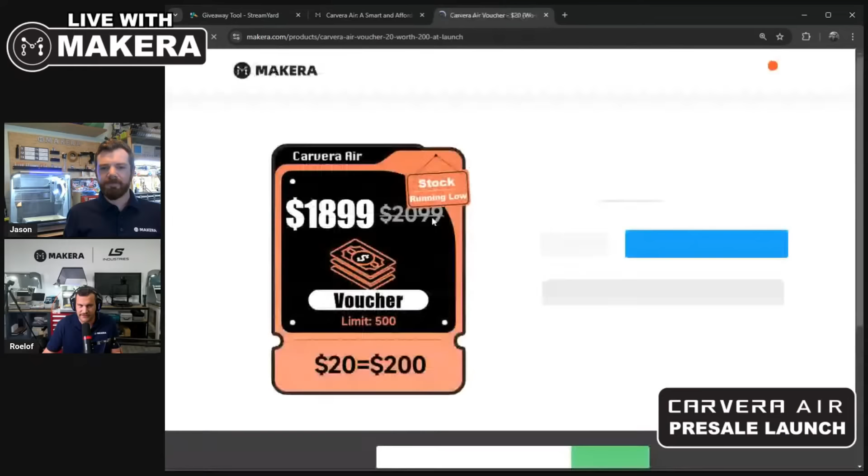So this is our website, we've just updated it. You can go to our store, to the Carvera dropdown, add to cart, and actually purchase the machine right now—it just went live. So obviously, the quicker you are in purchasing, the quicker you get your machine. Another big feature we have is a discount coupon code you can click on, where you can get another discount on top of the $2099, where you can buy the machine with the voucher for $1899 US. So everything is live, we have just launched, so if you guys are ready, go for it—the store is open and we're waiting for your orders, and we're ready for it.

And I think what we have to do here is, if you want the discount code or the discount voucher, you can buy the voucher first.

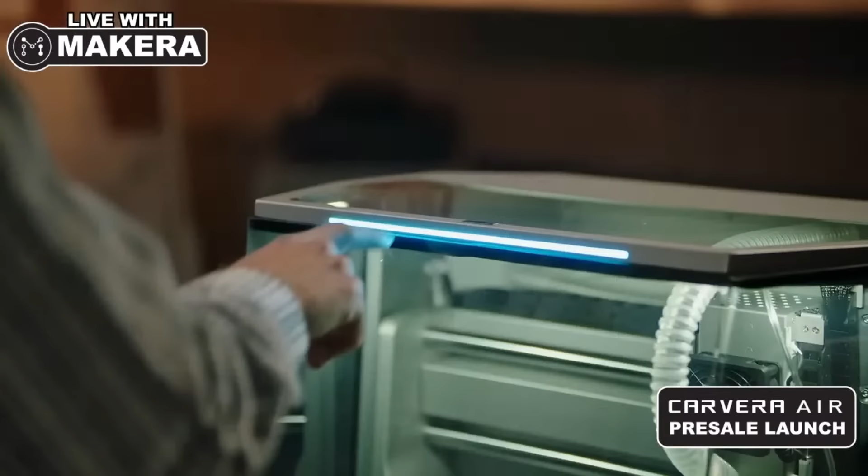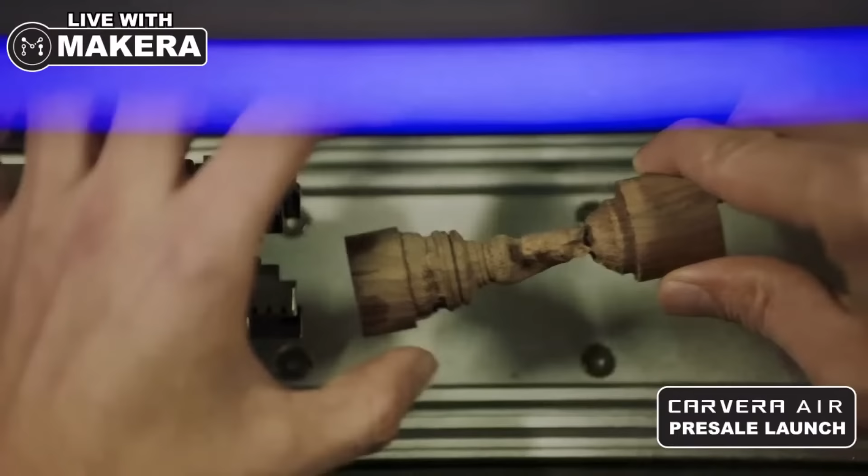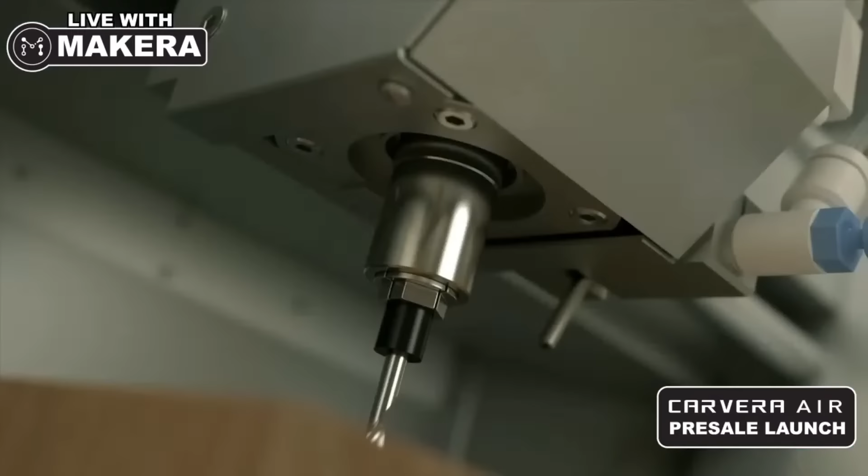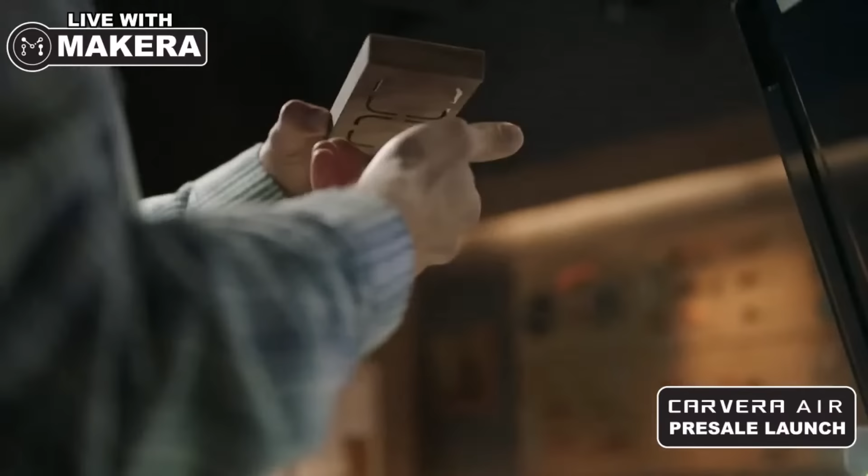Hello everyone, I'm Josh from Makera. Welcome to the Carvera Air pre-sale live stream, and good luck with the giveaways. As a group of veteran makers, the Makera team started by sharing common interests in model aircrafts, drones, robotics, and electronics. About 10 years ago, we were introduced to desktop digital fabrication tools like CNC machines, 3D printers, and laser cutters, and we were instantly hooked. These tools fundamentally expanded the scope and capabilities of what we can make. We can hardly imagine how fast, how precise, and how beautifully we can create almost anything. The only limit is our imagination. CNC machines have been developed in the industrial sector for decades, but remain rarely used in the DIY community. Unlike 3D printing, which has limitations in material precision and strength, CNC milling can process almost any material with high precision while retaining the original strength. We were thinking, why are there no CNC machines that are smart, precise, easy to use, that anyone can learn and use? 3D printing used to be a difficult industrial process, but now anyone can use a desktop 3D printer. For CNC, that kind of machine didn't exist, so we decided to make our own. Our mission is to democratize precision manufacturing by creating innovative, user-friendly, and accessible CNC solutions. We aim to empower makers, hobbyists, and professionals alike to bring their ideas to life, breaking down the barriers of traditional manufacturing with advanced yet easy-to-use tools.

Back in 2021, we launched our first product, Carvera Desktop CNC, on Kickstarter, introducing features like automatic tool changing, auto probing and leveling, fourth-axis machining, and laser engraving, all in a compact desktop machine. We raised over 1.7 million from more than 500 backers, becoming the most funded CNC project on Kickstarter at that time. Since then, we have sold thousands of Carvera machines worldwide.

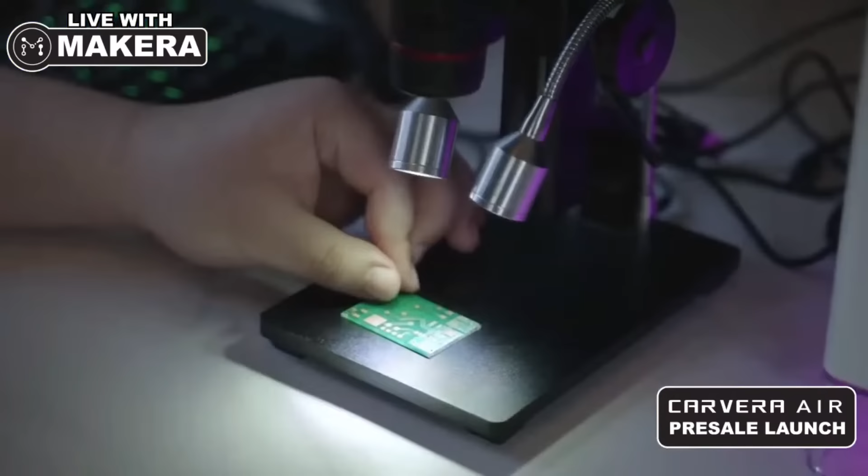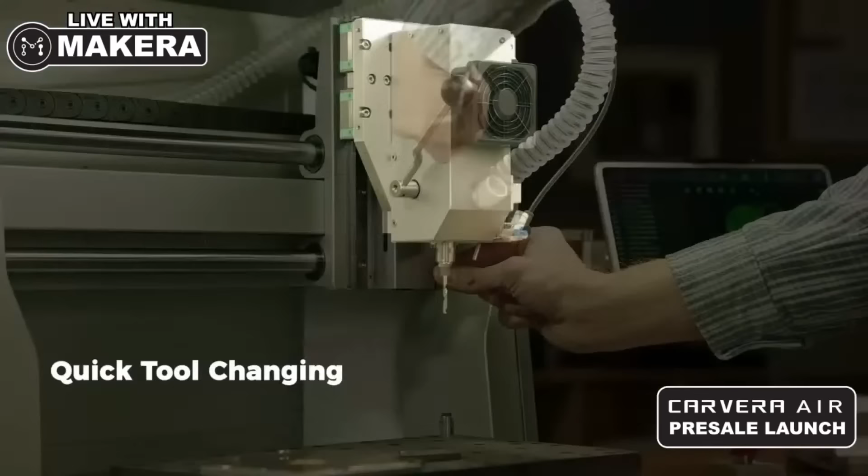Meanwhile, we have been listening to an increasing number of voices from CNC beginners who hope for a more accessible solution to lead them into the world of CNC. That's why the idea of Carvera Air was born, a machine that combines the core strengths of our latest technology with enhanced manufacturing and production ability, more affordable but without compromising on performance. It features quick tool changing, auto tool setting, an all-in-one die-cast frame, a fourth-axis module, and a laser module.

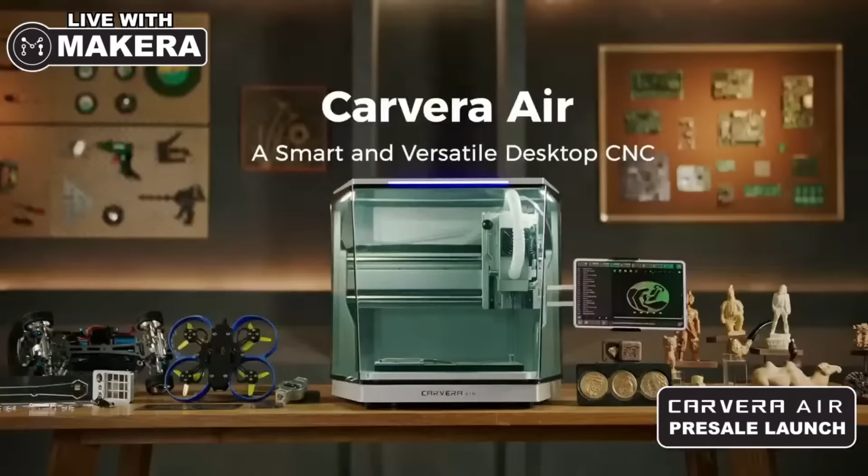We are presenting a revolutionary machine for a wide range of creators. With the launch of Carvera Air, we are incredibly excited about the possibilities the machine opens up for creators everywhere. Its portability and versatility makes it suitable for a wide range of applications, from prototyping to personal projects. What excites me most is the idea of seeing how our users will innovate with it, creating things we haven't even imagined yet. It's always inspiring to witness how our machines empower others to turn their ideas into reality. We can't wait to see what you will create with Carvera Air. Thank you.

So again, that was the CEO and founder of Makera, Josh Zhang. And really, Makera is just an organization of incredibly talented and passionate makers like myself, like Roelof, like all of you. And the Carvera Air is just the latest and most exciting product to get out there to allow you to create and innovate, which is really fantastic.

One thing that Josh mentioned there was that the Carvera, the first CNC, started as a successful and ambitious Kickstarter campaign, raising over $1 million. And Roelof, tell us how the Carvera Air launched and how that got out into the world as well, if you don't mind. Yeah, it was quite big.

Our second product that we launched, it was fully funded in May of this year, and we had just over 2,000 backers to back this project. And obviously, because we had the Carvera already launched, we had the people behind us. We had people that's already using our machines and know what the capability is and how well it works and the reliability of our machines. So due to that, we actually raised 3.5 million on this new project.

With that, we have opened a whole new factory space for the mass production of these machines, and it's absolutely incredible to see. I'm going there on Sunday to actually go see the factory. I think I'll shoot some videos about how this machine gets assembled in detail and just go see every part of every corner. I kind of want to understand exactly how this thing gets put together, so if there's anything that could go wrong, I'll know exactly what to do.

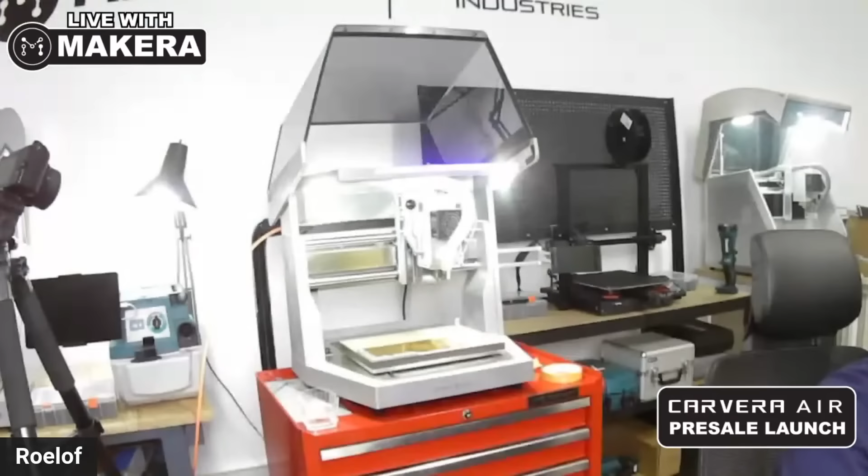Sorry if you heard a little noise, I just put on my air compressor for a second because I want to show you that too. I'm putting on this cam so you can see the machine, and let me just change my mic over here so you can hear me if I'm away from my microphone. Can you hear me? Yep, you sound great.

That's great. Okay, so I've got this nice little trolley so I can rotate the machine and show you exactly how this works. I think I'll start with the air assist. At the back of this machine, let me just recap the lid so you can see it from the side. This is exactly how it works - it hinges back, and then you move it forward and close the lid. It's as simple as that.

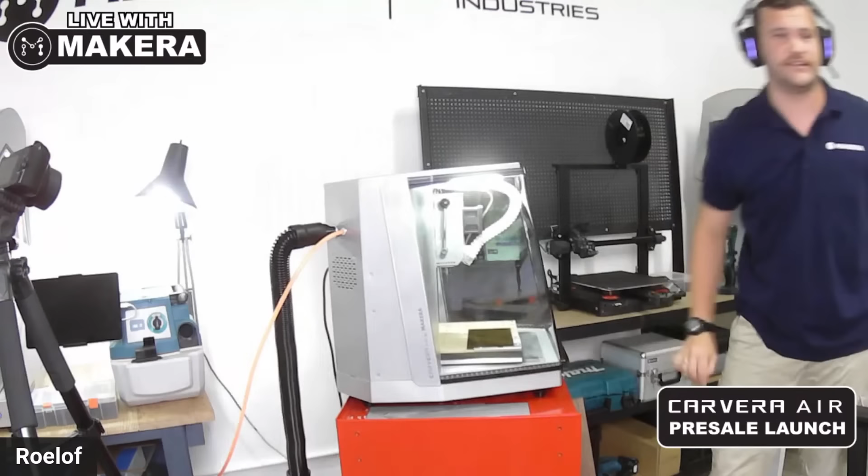And there's also nice space saving, just like Jason explained. So the lid is quite cool too, because you can see from the side as well - you can get some nice angles of what you're actually milling on the machine.

Moving on to the back over here, the air inlet is as simple as just plugging in an 8mm tube and putting it into the hole. I've already connected it there. I do have an air compressor, and then you have this blue little knob over here which, if you turn it, controls the outlet of air. So you can kind of see - yep, I think we'll show a closer shot, we can do a close-up of that. Let me just close that again.

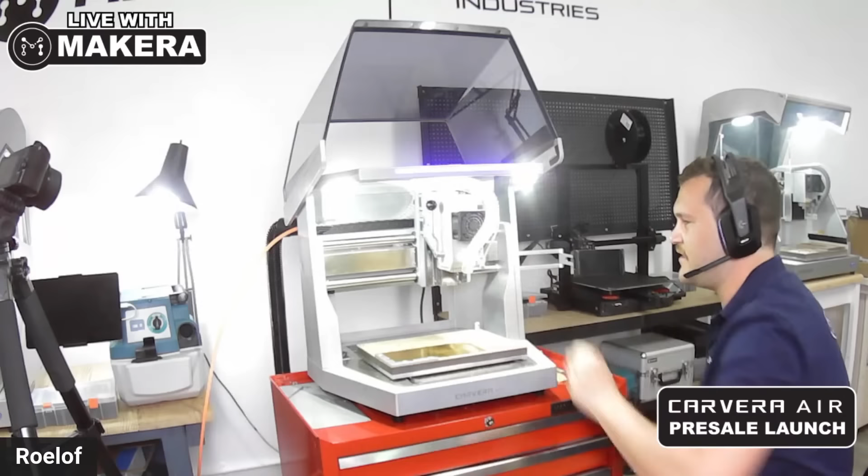Another big feature for some people that will use this machine for longer jobs - in case you have a longer piece of project, you can actually mount the stock through the machine. If I do a side view, it actually passes right through the machine at the back. So if there's a project that's on the longer side, we can support that, which is quite a nice feature. It doesn't come open, so there are just 6 screws you have to remove, and then you can use that feature to extend the range of your stock.

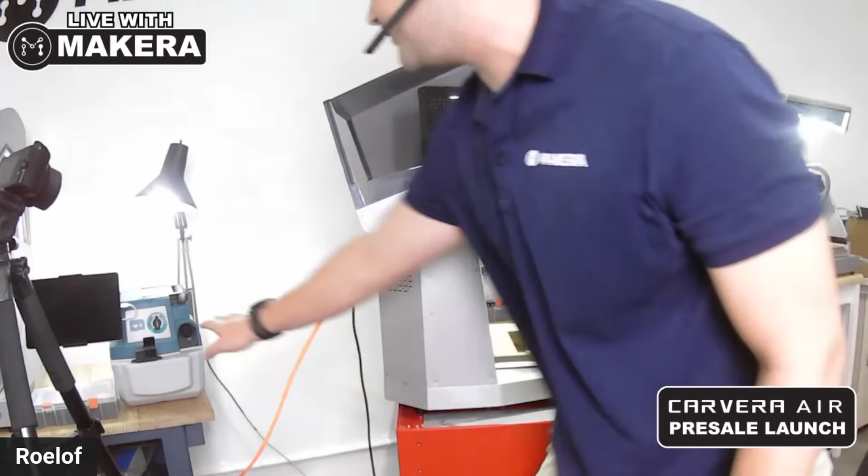And then the external dust collection - let me just touch on that too. There's an outlet at the back here. There's no internal dust collection, so it's actually an external dust collection. I've got a little Makita hooked up here. Basically, I 3D printed a little nozzle, and depending on what pipe or vacuum you use, you'll put that in there, then plug that into one side, and plug the opposite one into your external dust collection.

And then on the inside, if I move back this way, you have a dust foot, this guy over here, which is magnetic. So it's quite easy to remove, and ease of access is quite important. You can just pop this into its position, put in the vacuum hose, and you're ready to run your dust collection once linked up to the vacuum.

So these are just some basic features. I don't know if there's anything I missed there, Jason. Yeah, the air assist, the vacuum, and the pass-through. So these are just the basic features - there are many other things we can go on about, but to keep it simple for now, I'm going to hand over to Jason to talk a little bit about the tool changes.

Yeah, I think we have some cool questions here going on, so I'm going to bring us in on this nice close-up view. First off, some folks want to see the dust shoe a little bit closer. As Roelof just showed, the dust shoe is magnetic, so it simply locks right onto the spindle and you can easily remove it. If I hold this side up to the camera, you can see the magnets right here. When you're not using the dust shoe, you can simply lock the hose pipe into that clamp, and with the hose pipe out of the way, you can see this little blue knob here.

This is the knob that Roelof was adjusting for the air pressure. So if you put your air compressor air line in, you have this knob here that you can twist to adjust your air pressure depending on what you're doing. We'll show you how that could hook up for the laser engraving module in just a little bit.

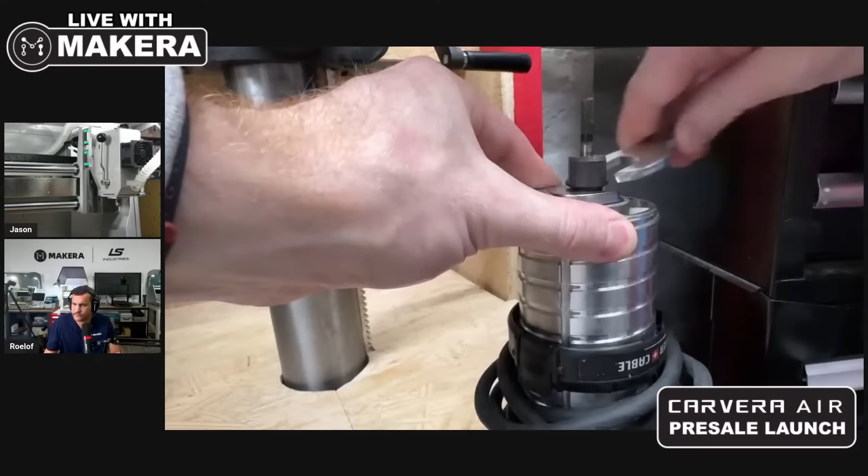One of the most clever aspects of the Carvera Air is its tool changing method. Traditionally with a non-automatic tool changing CNC, which is very common, you need to use a wrench system to actually change the tools. In case you're not familiar, this video shows a traditional router where you need to use a series of wrenches to get your bit in and out of your CNC machine. But with the Carvera Air, no wrenches are needed at all.

You'll see we have this handle on the side, and this handle is what opens up and unlocks the collet rather than needing a wrench. So if I want to load a tool, I can simply lower this handle down like so, carefully insert my tool into the collet down here, and then raise the handle. Now that bit is fully installed and inserted.

If I want to do a tool change, which will not happen automatically, the machine will pause automatically. So in your CAM software, if you say you need to do a tool change - and we'll demonstrate that when we machine something in just a few minutes - it will pause and notify you that a tool change is required. I simply open up my machine, pull this handle down, grab another tool and insert that. It's a very quick, very easy, toolless tool change, which is one of my personal favorite features and one of the most unique features about why this is such an intuitive and easy to use machine.

Something else you'll notice is we're using the same bit collars, this little black piece of plastic, that we use on the Carvera. The bit collar is not required, however it does allow you to ensure that you don't insert the bit too far. So the bit collar can act as a stop when you insert the bit into the spindle of your CNC. Those bit collars can be installed using the collar installation tool, which comes in your tool kit.

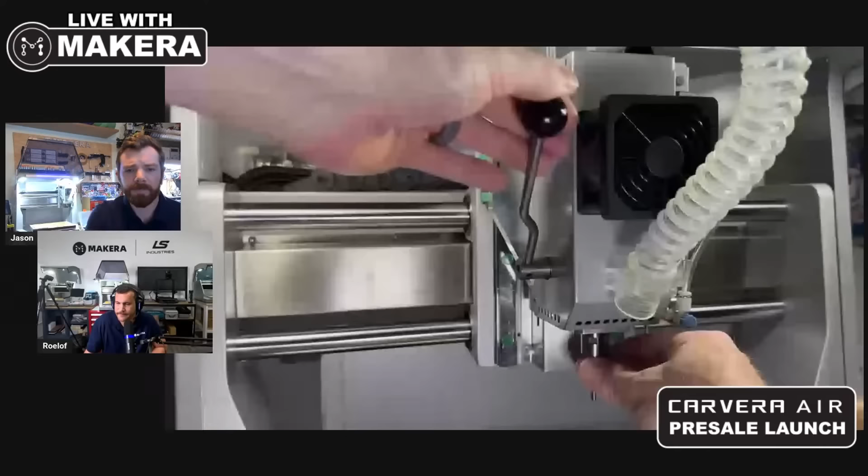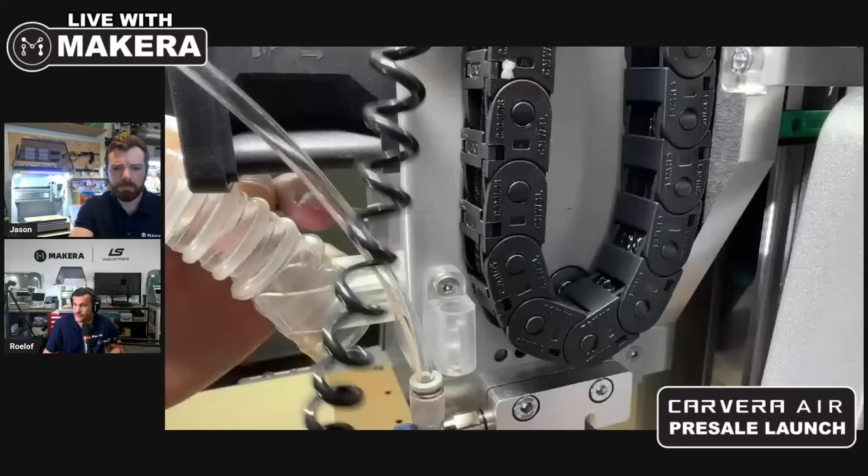I'm going to show a little video clip of us operating the probe, and if you want to just explain what the probe does for a user, I think that would be really helpful. Yeah, let's do that - I think it's quite a neat feature. So to insert it, you obviously use the quick tool changer. You insert it like this by just pulling this lever down, and to remove it, same action.

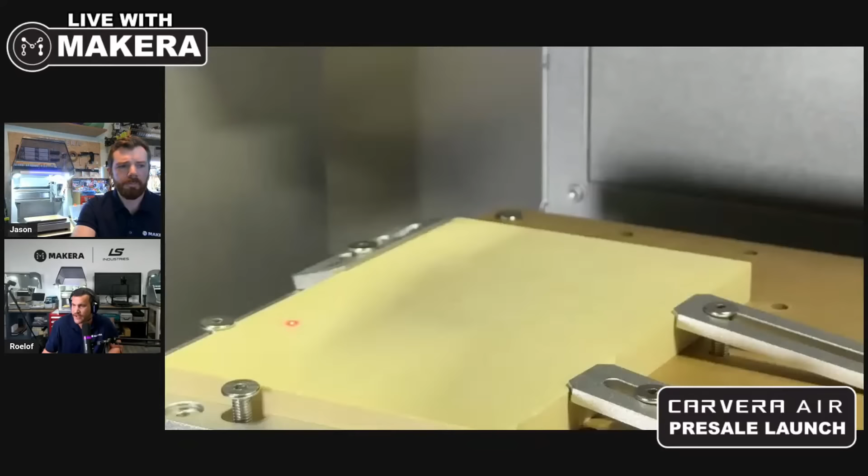When it is loaded, it'll actually do a tool length detection, and then it will detect that tool length. After that, it scans the margin, and you can see a small laser pointing out the exact outline of your project.

So in that case, you can make sure it's not going over any brackets or causing collisions, and you can avoid it by watching that laser. Then it'll do a Z probe, which just touches the top of the material. That sets your Z height to 0. Let me go back a second here. So if it probes for that second, that did the Z probe, and now it detects the height of the stock, setting your job to Z0.

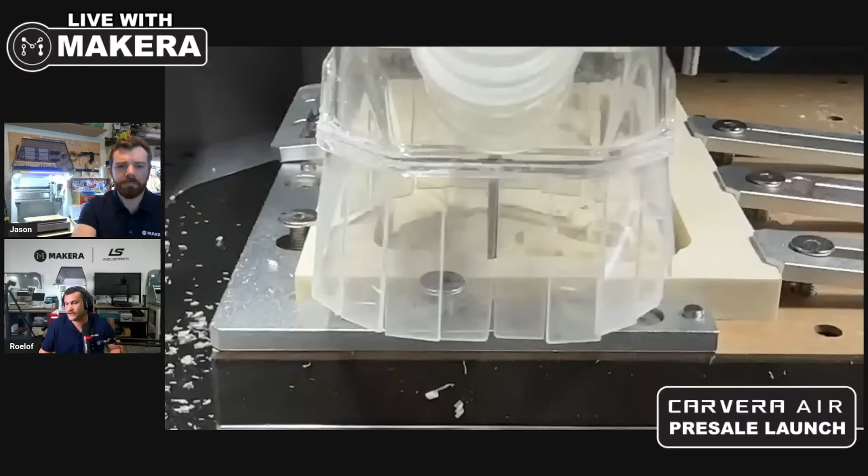After that, it will do an auto leveling map. This can be useful for many reasons. If you want to flatten your stock, that's the main reason. But if you have a curved surface and want an engraving to follow that curve, you can use this probe to map the surface so your 2D design can actually warp to match it. It's quite a neat feature that can be useful in many ways. And the scan laser also helps avoid collisions or mistakes made on the CAM side.

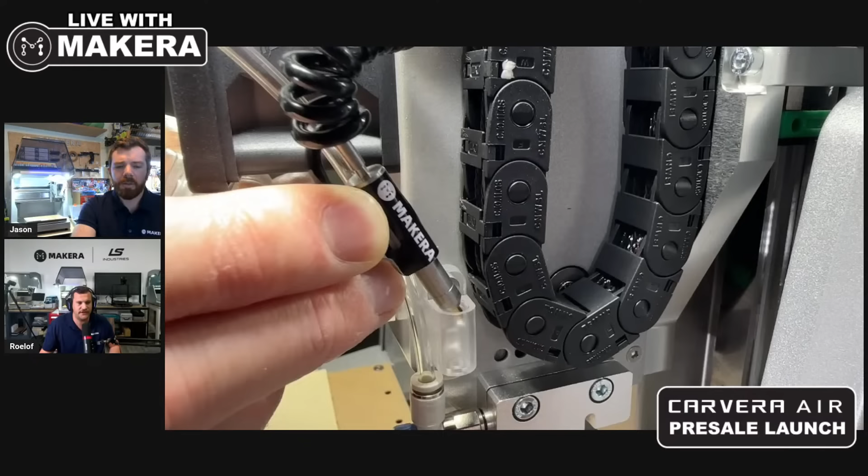So it's such a cool feature. And then there's something else you can also put in this tool changer. Maybe Jason, you can tell us what that is.

Yeah, sure. So something else you can work with, in the event the wired Z probe doesn't do the job — let's say you're working with a piece of stock where you're not only concerned about the Z, but perhaps the X and Y as well. If you're working with a two-sided product, or want to flip your stock over, you also get a manual, more traditional XYZ probe.

This is super easy to set up in the Carvera controller app, which is what you see right now. Essentially, you use a conductive probe which will detect X, Y, and Z, finding not only the height of your stock but also the edges, which is really handy.

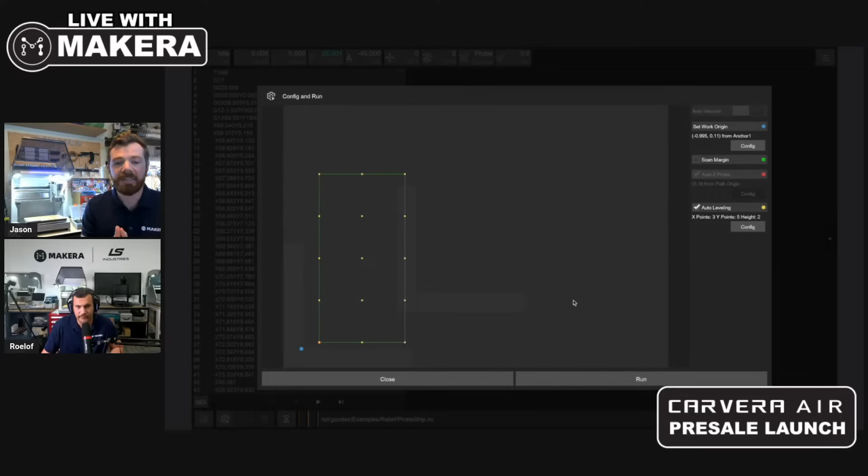That's really ideal compared to the wired probe Roelof just mentioned. But when you're working with a piece of stock that you want to flip and reorient, if you don't get it perfectly squared up when you fix it back down, this will allow you to make sure you're nice and aligned.

So both of those items come directly with the Carvera Air as standard — they're not accessories. Although we do recommend ordering extra wired probes, because one of the most common introductory mistakes is accidentally crashing your probe into a clamp or vise and snapping it. That tends to happen, and it's one of our more common customer support issues. So buying a spare probe is easy to do, and it comes in a nice little kit like this.

I also want to point out that the probe comes with different shank diameters. So if you change to a quarter-inch spindle shank, or a 3 millimeter or 6 millimeter spindle shank, the probe shank diameter will also change, so you can continue using the wired probe even if you change your collet spindle.

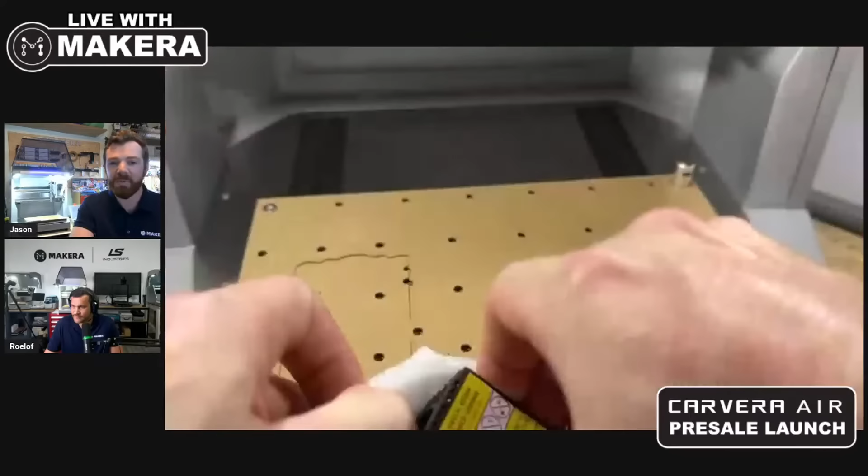As you can see here, you can attach the laser engraving module like a tool — it loads just like a bit. You can use this diode laser, a 5-watt diode, to engrave a lot of different materials and even cut some soft materials, like this piece of soft fabric here. Because it loads like a tool, you can use the probe we just showed you to figure out the Z height of your stock, so the focal length is automatically adjusted using the probe, which determines the height of your stock and whether it's warped.

After the probe is done, you can load the laser, just like you're seeing here, which inserts directly into the spindle collet, making it perfectly aligned. So you don't have to calibrate it, you don't have to align it. It automatically centers and aligns and plugs directly into the head of the CNC, just like this.

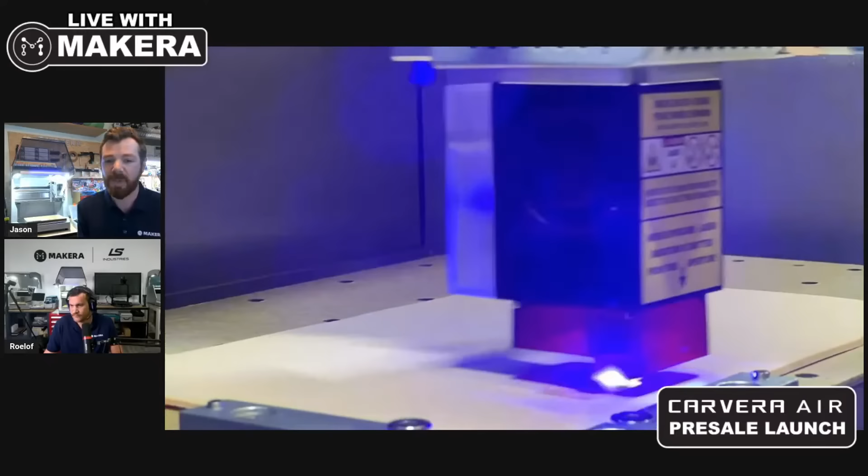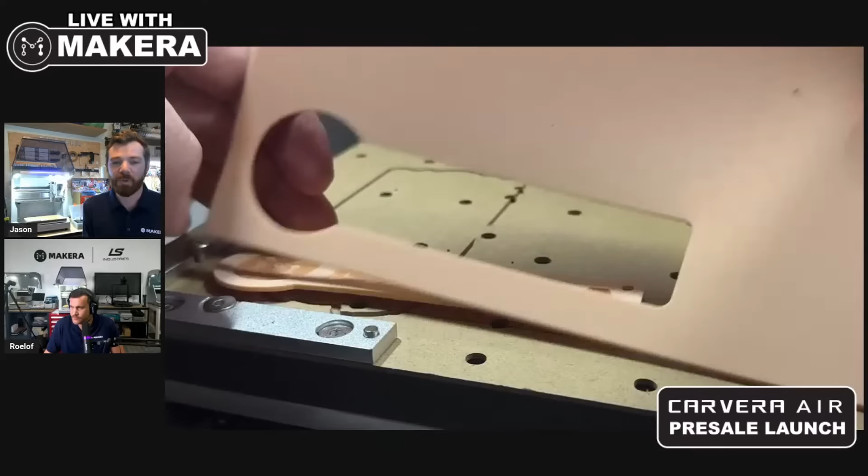And it even has an air assist system that hooks right up to the air nozzle. It will then measure the height of the laser and automatically adjust that based on the focal length. This is sped up here, but you can see you can engrave softer materials using the diode laser. You can also cut softer materials depending on what they are, like papers, fabrics, felt, things like that.

And this will allow you to go ahead and engrave or cut with laser functions on your CNC. As mentioned, what this really does is it just adds to the versatility of what you can create with your Carvera Air. I love seeing some really versatile projects like what it showed in the video, for example, creating custom PCBs where the silkscreen layer can actually be engraved with the laser by curing a silkscreen mask using the diode laser, which is really fantastic.

You may be familiar with lasers, and you may be familiar that they can't machine through very thick material. Well, because this is a CNC mill, it can machine through very thick materials. So you might machine a very thick piece of wood like this with your milling head and then engrave it with the laser. So you can do a hybrid project where you are milling and laser engraving all in one with a simple tool change.

For example, this nice little wood character of my dog here that I laser engraved, it's made out of almost 1.5 inch pine. A really thick piece of wood that was cut using my milling function and then engraved with the laser function.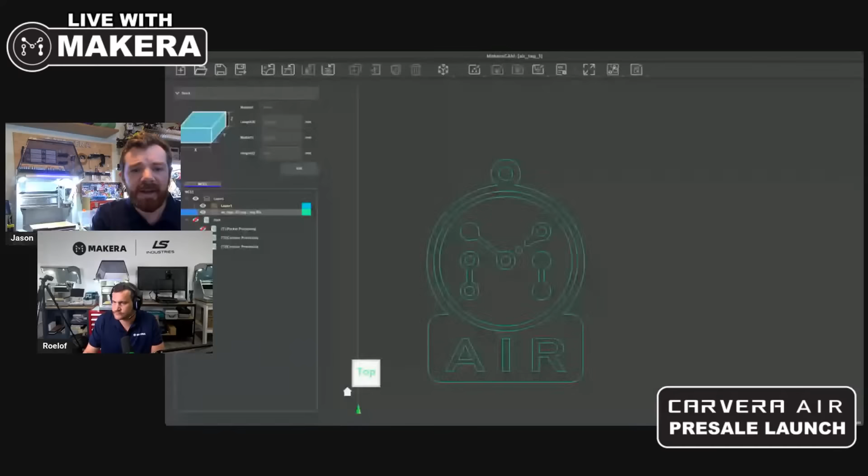All right, so this is MakeraCAM public beta, and we actually have a huge update coming to MakeraCAM in December. Stay tuned. Right now in MakeraCAM, you can import 2D files like this, so this is just a two-dimensional design that I've created, a little Carvera Air tag, if you will.

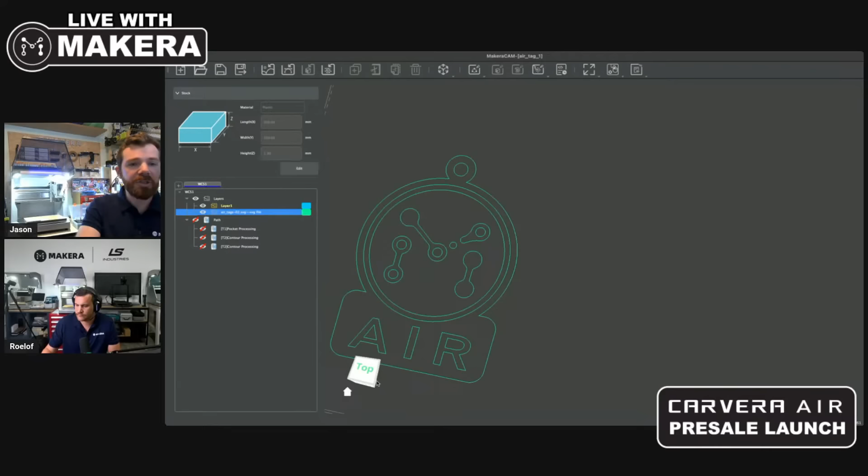But coming in December, you'll be able to also import three-dimensional files like STL files, and also do 4th axis machining in MakeraCAM. At the moment, we have the two-dimensional design features like this, and also the ability to manufacture with PCBs, and we have lots of great YouTube videos on that.

Now you can import a file in a wide range of file formats. For example, I can import an SVG or DXF file, which is what this was. But you can also import a picture right into MakeraCAM, and prepare that picture for manufacturing by simply doing an automated trace. Now, I'm not going to run through the whole thing right now for the sake of time, but we do have the tutorial video on how to create tags like this on our YouTube channel.

That's a little bit more extensive, you can check out. What I want to show you are the paths. The paths are what tell your CNC, like the Carvera, what it needs to do to actually go ahead and manufacture. That's what these white lines are.

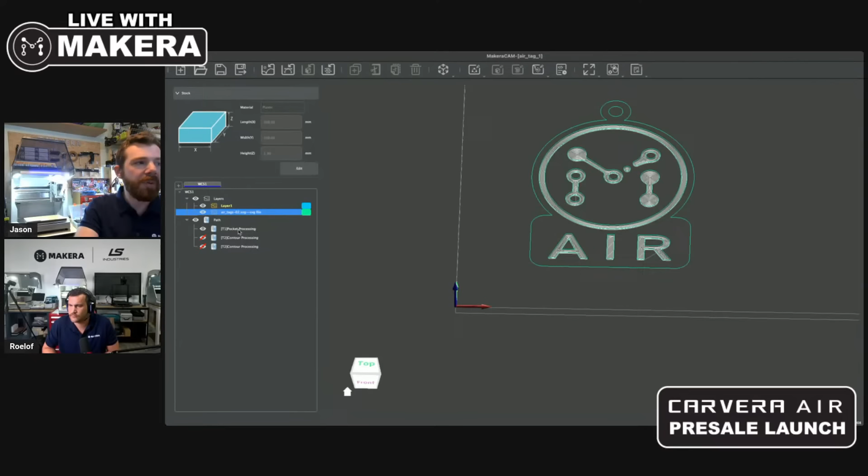So I'm going to open up this path that I've created. The toolpath allows me to choose what depth I want to cut. For example, I want to machine this at 0.2 millimeters, so that's how deep I'm machining. You may also notice in the top left corner, I've already set my stock, which we call material, to be plastic, and the size I'm working with. That's an important step.

And I can also select my bit. We've preloaded MakeraCAM with every tool that we provide, so any tool you see that you can get from us, you can find not only the tool but also the correct feeds and speeds for all the different materials that tool is compatible with. I saw some users asking earlier, can it machine metal and things like that? Absolutely, and Makera CAM makes it pretty easy to see that this bit is compatible with aluminum or copper. But if I were to go to this bit, you'll notice that it's not, so it helps you make sure you're picking the right bit for the job.

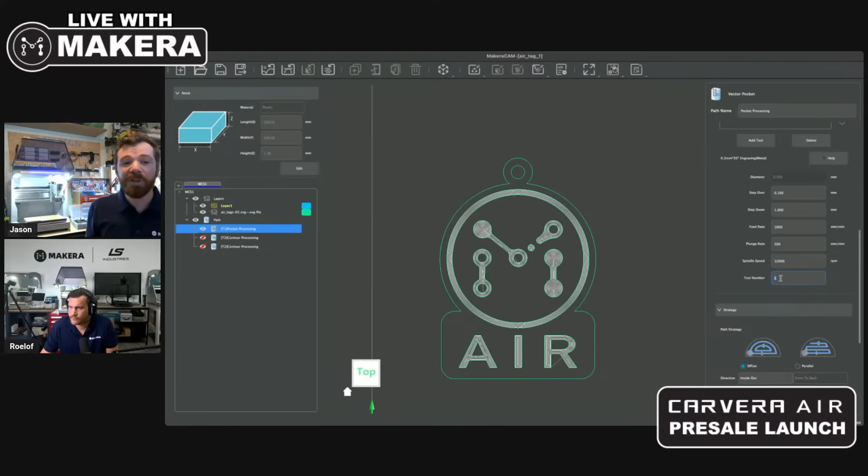After that, I can adjust the speeds and feeds if needed, and also assign the tool number. The tool number is the order you want to use the tool. For example, we talked about tool changes earlier - if I want to use this tool first, I set it to be tool 1. There are some other settings we're not going to get into right now, but what it does is essentially prepare this toolpath, this pocket, to machine this logo I've already prepared earlier.

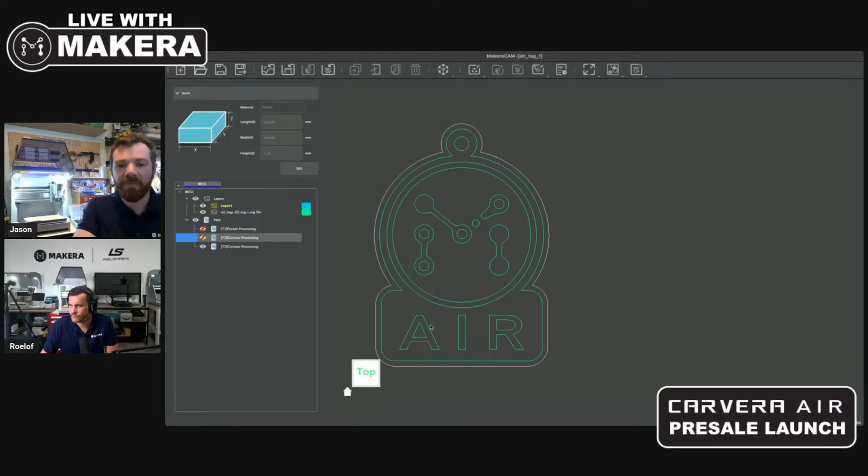I then have two other toolpaths, and instead of machining the pocket, which clears out a big cavity, it cuts the outer perimeter. This toolpath here is what machines my little hole for my keyring, and this toolpath here is what actually cuts the tag out of the material as we go. So with three toolpaths and two tool changes - because this uses the V-bit and this uses another tool, a different type of tool to actually cut the part out - we should be able to manufacture this tag out of what we call bicolor stock material.

That bicolor stock material looks like this, where one side will be metallic, blue, red, or whatever it is, and the other side is a contrasting color. So when you machine through the surface, you get a really nice tag design. It's used a lot in the sign industry - you've probably seen signs like this in public spaces. A lot of these types of products are made with CNC machines.

So that was a crash course on CAM. Roelof, do you want to walk us through how to get that CAM design onto the Carvera Air?

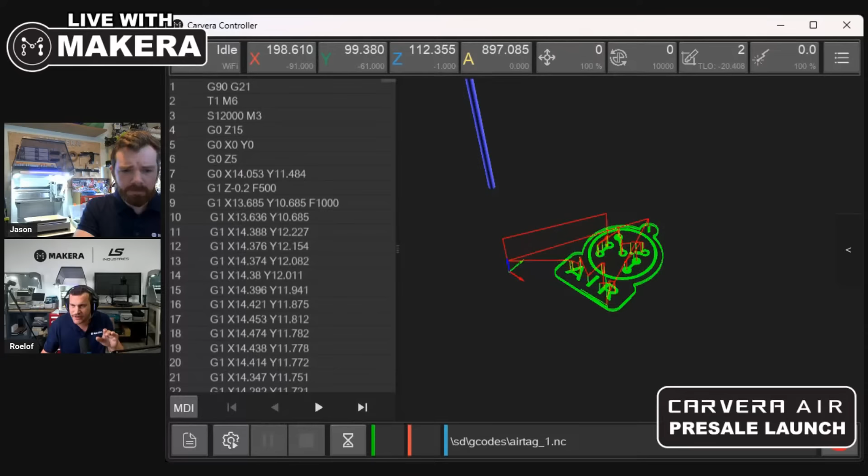So we're jumping over to my computer now, and my computer is linked up to the machine via a Wi-Fi network. Just to give you the background of the controller itself - this is the controller, and this is a visual window of what the toolpath looks like. These green lines are exactly what the toolpath is going to do. If you click on this window, you can see how the tool follows exactly each toolpath.

Over at the top here, let me go to full view - you can see that. There are two different tools we're going to use in this example: there's a V-bit to do the detail engraving, and then there's an end mill, which is going to do the outside cut.

Now I'm not going to go into too much detail of the controller right now - we'll have videos online for that on our YouTube channel. So let's actually start milling this thing.

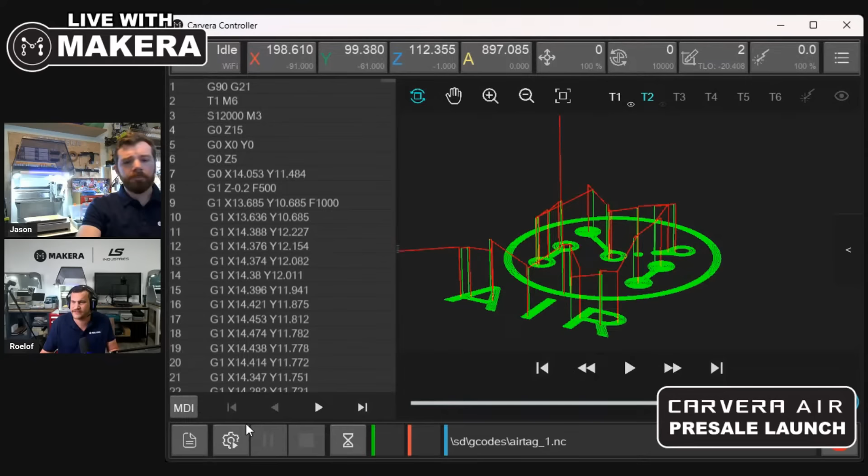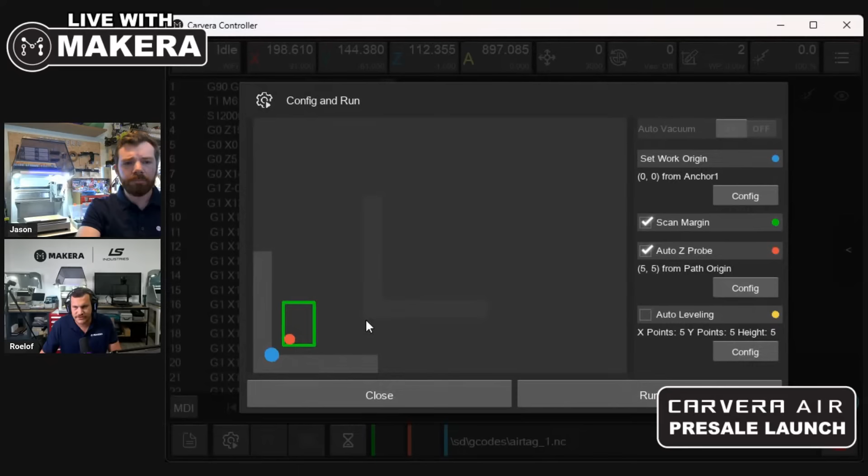I'm going to go to the run window over here and set my config. This L shape here is actually the L shape that's on the machine currently, and your anchor point 1 location is in that corner, the inside corner of that bracket. So I'm just going to set my offsets to 0 over here. I'm going to activate the scan margin to see if there's any collisions, so it can actually just outline my part.

I'm going to activate the Z probe to get the top of the stock height, and then we're going to do auto leveling as well. It's not a very big part, so I'm just going to go to 3 points in X and 3 points in Y. So you see like that.

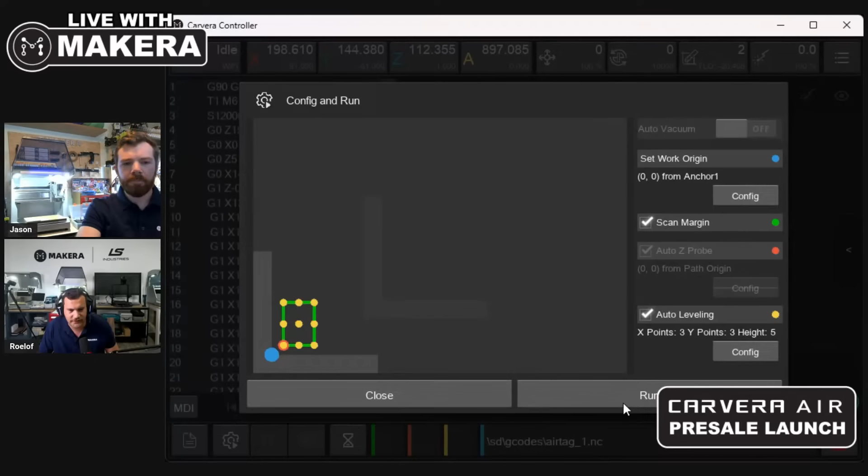Okay, now I'm going to head over to my machine cam. Let me just go here first. So I'm gonna hit run. I know the tool 2 is loaded now. So I'm gonna hit run on here. And now the machine is moving.

So it's asking me to change the tool. Let me go to this cam, and I'm just going to change the tool to the probe. It's basically just this lever, like Jason explained, just this lever. I'm actually going to take off the dust foot now just for display purposes. And then I'm going to add the wireless probe in here. You can either go from the controller or from the machine, you just hit the top button. It's loading the probe. Now it's going to do the tool length detection.

You have to always make sure that area is clean. If there's any dust or things in the way, it's obviously going to affect your Z height levels. You also have to make sure the stock is secured well enough. For this material, I just use double-sided tape. But if you're using a thicker stock material, you'll actually use brackets to mount it to the machine bed.

And I've also got this little MDF, which is quite a cool feature. I put a full MDF over the whole bed, so if I mill something and mill into the bed, I'm not milling into the black MDF bed, which is the machine bed. Do you have a closed cam we can switch to so they can see that? I do, there we go. So this is now showing the probing sequence, and they can get a good view of that MDF bed you were pointing to. I should point out that MDF bed does come with the Carvera Air. We give you a couple MDF spoil boards right out of the box, and you can order more because they are wear and tear items.

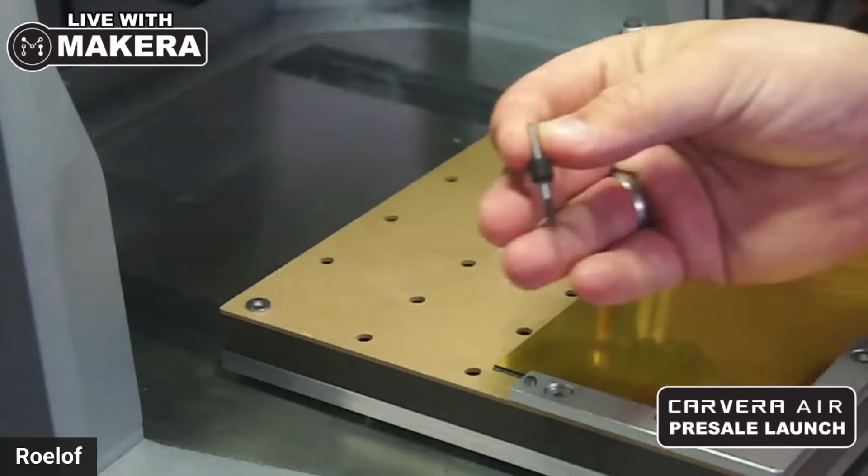And now I'm going to add the V bit. My controller has called that I need to change to tool 1. So let me see if I can do the cam here. You can see me tool change. So I put the probe back in its place. As you do that, I don't know if you can see, but you'll notice that the LED light bar above the CNC is flashing just a single light. That tells Roelof that he needs tool number 1, so that's one light flashing for his first tool, which is pretty cool. So then I just hit the button at the top again, and now it's going to detect that tool length I just applied, and then we're going to do the engraving.

So let me go back to close-up cam. You can see the bit in the corner there. For display purposes, I'm keeping the lid open. Obviously, it's always recommended to keep the lid closed, but just for this small part, you should be okay. Yep, there we go.

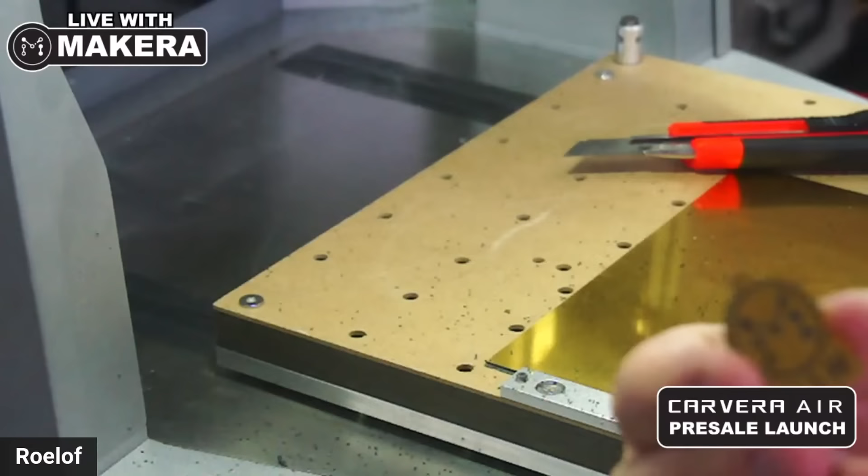All right, I think we're there, Roelof. That looks pretty good, yeah. Let me just give this a little clean, and let me pop this out. Look at that—nice sanding. And that's—let me just grab it there. And there is our Carvera Air tag.

So it's a small part, obviously just an example. I saw people commenting they want to see aluminium being milled, but that's quite a long video—any aluminium job usually takes some time. Or any metal job, let's say, and any bigger parts, that'll take a lot more time. We don't want to sit here and just watch a machine mill, although some of us might want to. That'll take time, for sure.

Listen folks, again, I think our main goal was to show you the whole process of going from CAM to loading it, to then getting your bits installed, getting your stock installed, to make a real product in realistically just under 10 minutes there.

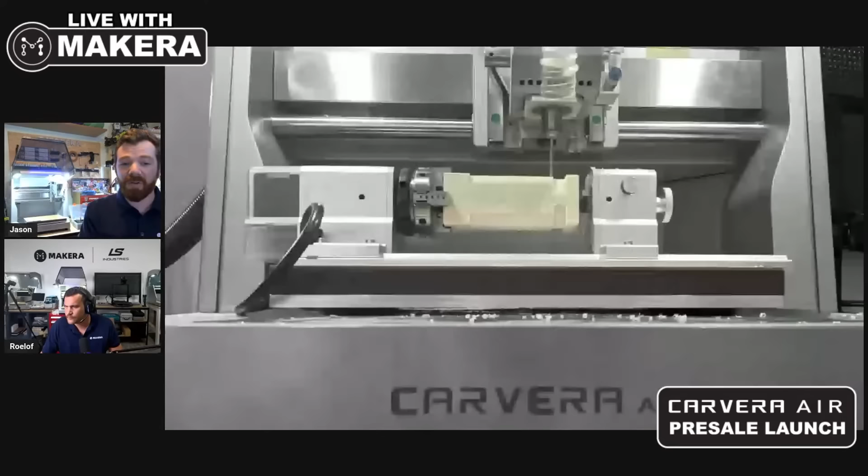And that is the fourth axis module. So the fourth axis is an accessory that existed for the Carvera, and it's an accessory that exists for the Carvera Air, as you can see here. The fourth axis simply mounts directly to the bed.

Roelof, why don't you describe what the fourth axis could do for our viewers here? Yeah, so this is just an example that I made on this machine. I'm just going to pause it over here to run through what this is. So this is a harmonic-driven fourth axis, meaning it's a very high torque system compared to our older version, which also had high torque but in bigger form. If you want to make bigger stock, use denser materials, harder materials, then this fourth axis is a lot more durable.

So what I'm milling here as an example is just a Nefertiti, out of epoxy tooling board, but you're not limited to any materials on this too. You can do aluminums, obviously epoxy, woods, brass, very complex shapes like Jason's showing there, and then you can do small details, you can do larger things too. You're limited to just under 10 centimeters, which is quite a thick piece of stock you can actually mount in there, and then a width of 20 centimeters - maybe you can just translate that to inches, Jason.

So basically, if you mill on the 4th axis, what you're going to do is first do a roughing pass. That takes away the bulk material as an offset to your model - that's basically what it's doing here. If I play this, it's now just doing a roughing. If I go back to the start, you'll see it's a square block stock, and then it just cuts off the bulk of the material to almost the correct detail. After that, you go to a finishing pass, which clears up the model, and that brings it to the finished model that you require.

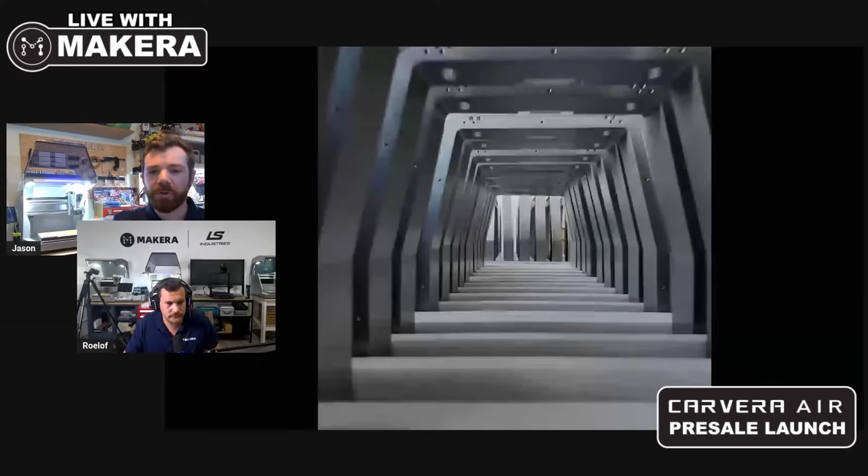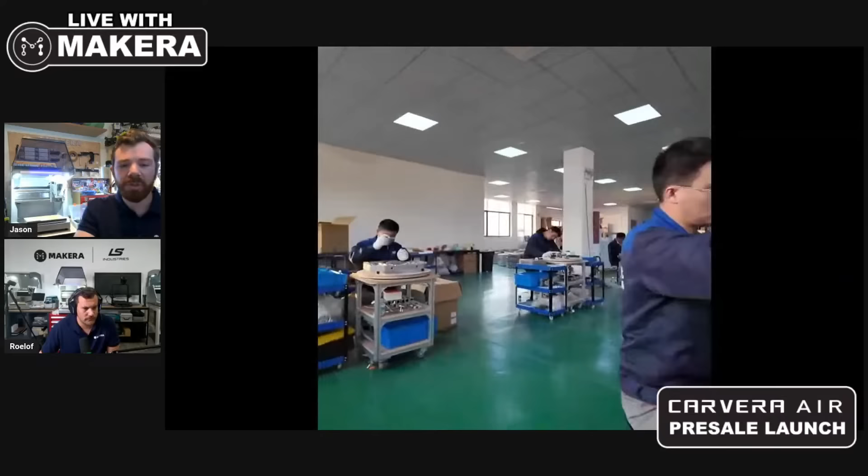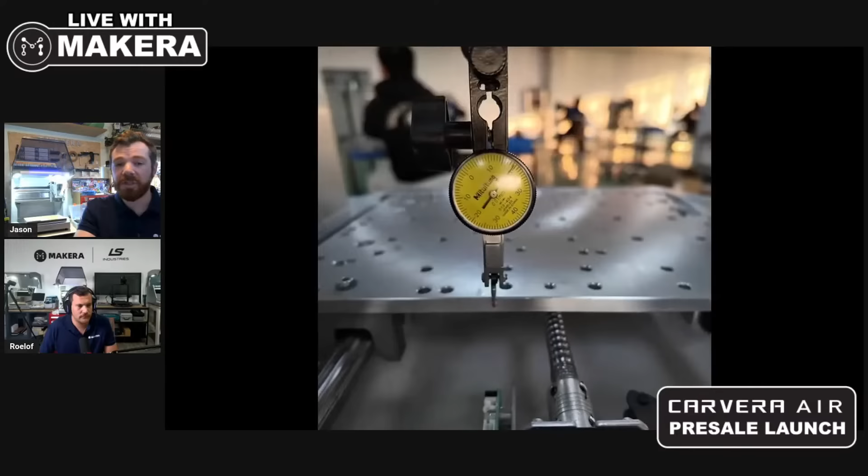Great recommendation, Roelof. What you're seeing now is inside the Makera factory. You'll see we have a lot of our parts laid out in different stages of our manufacturing process. We have different stations, folks dedicated to doing a single task along the way, highly specialized and trained in what they do, with tolerance testing every step of the way to make sure the machining process with this new solid metal frame is up to par, everything's square, and you're getting the level of precision you need, so when it arrives you can start machining right out of the box.

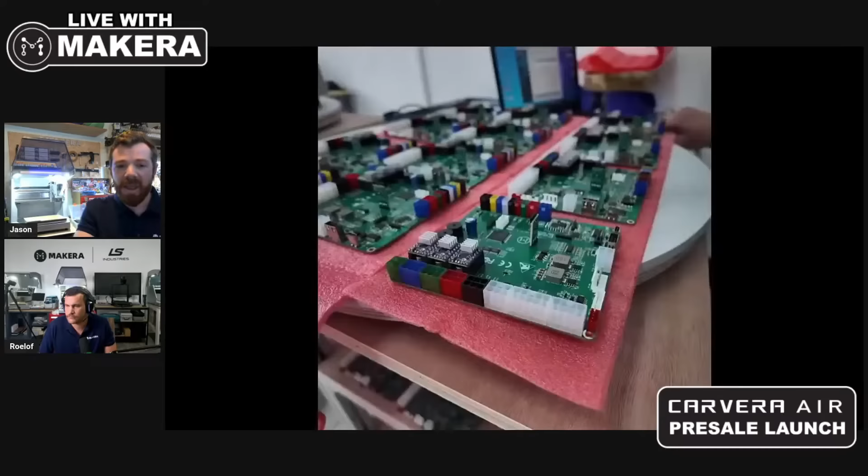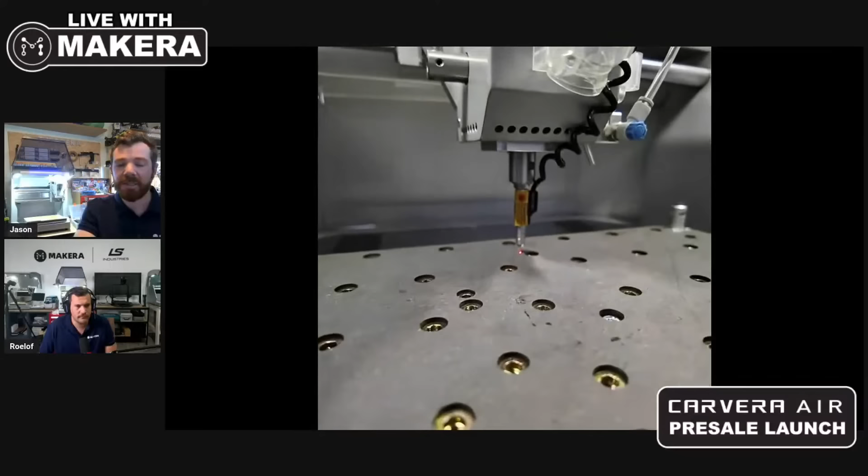We use closed loop stepper motors for the Carvera Air compared to the closed loop servo motors in the Carvera, with our own controller board we've designed that runs on open source firmware. We also test these machines before they get packaged through a series of different motion testing, manufacturing testing, calibration testing, pinpoint testing, making sure everything's aligned and operating 100% as it should be before it's packaged and before it goes out to you.

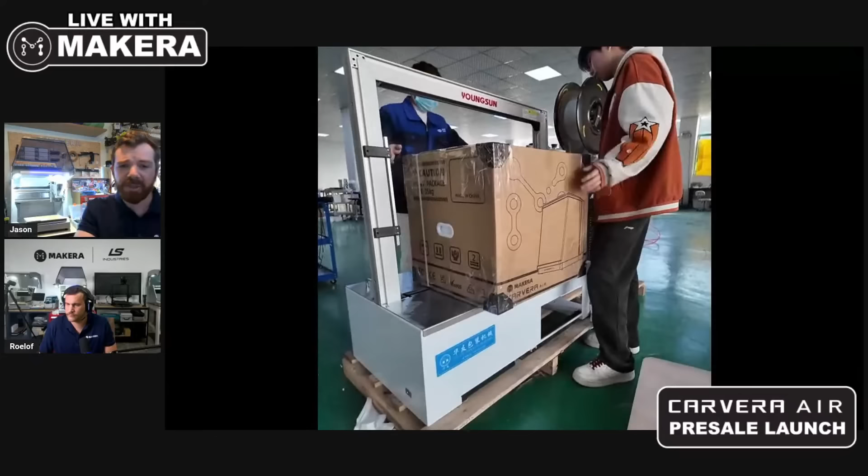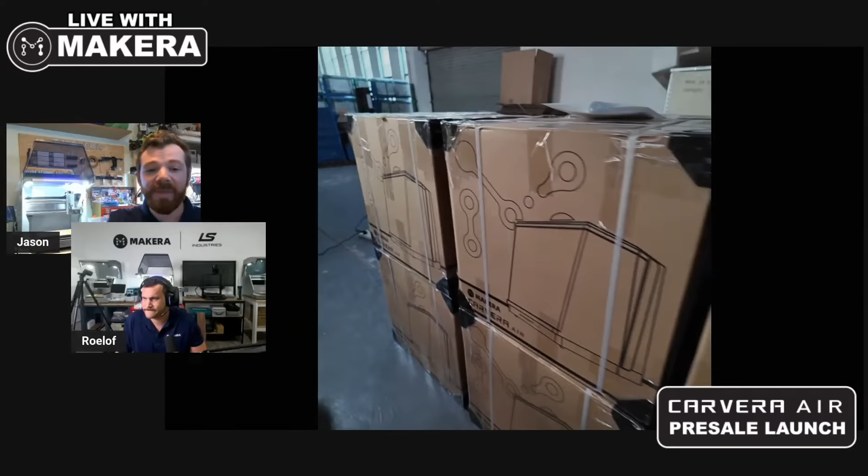One thing we spent a lot of time designing for the Air was the packaging, because we're shipping it in a cardboard box instead of a wood crate to make it easier to ship across the world. We spent a lot of time dropping these boxes, trying to crush them, shipping them to different contacts all over the world to test how they arrived and make sure they arrived fully functioning out of the box. That's what Makera has been doing the last few months since the Kickstarter campaign was fully funded, and that's why we're super excited these Airs are now on sale and ready to go.

In terms of timeline, I see quite a few questions. The Kickstarter backers are in the process of being fulfilled, so we're sending out machines to our Kickstarter backers in the waves we've promised. We're excited that into the new year we'll be able to start delivering these pre-sales as well, so over the coming weeks stay tuned for more updates. As we drill down on shipment dates, once you order you'll be notified from our team and you'll be up to date on when those things are going out.

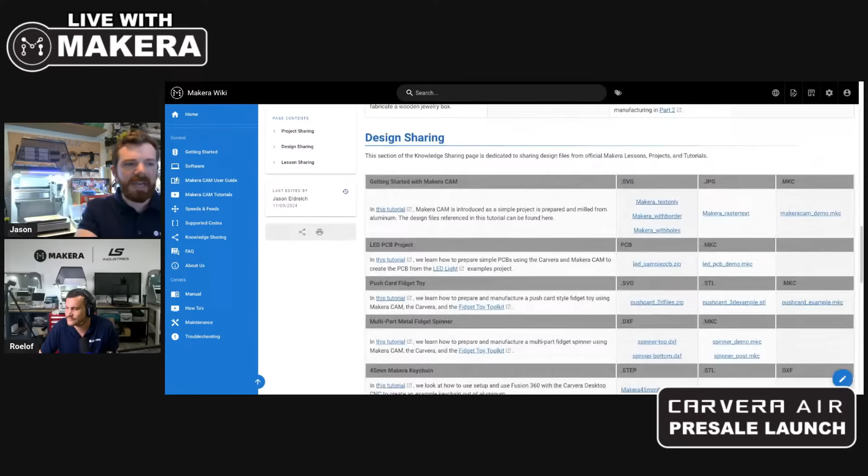One thing we've been working on the last few months is our knowledge sharing page on our wiki site, which at the moment is just us. Usually it's Roelof or I creating tutorial videos and content. A lot of these focus more on the Carvera, although we have a ton of Carvera Air content coming out in the coming weeks. For any one of our videos that shows you how to create an awesome thing, if you scroll down a little bit, you also get the files for that. So all the files are always shared across all the projects we do.

I know I have a lot of educators in here as well, so we're also creating a lesson plan series, which at the moment has one public lesson with a few more on the way. These lesson plans not only give you the files and designs, but also assessment rubrics, pacing, standards for instruction, and all the instructional resources you need to bring subtractive manufacturing into the classroom.

We as a company are always striving to improve. If we have some really talented and excited users interested in being part of this and sharing files and engaging with their community, we're always looking to expand. Please feel free to reach out to us and share your ideas on how we can continue to support you more. This is just one exciting step towards where we want this to grow as our user base grows with our Carvera CNCs out there in the world.

Yeah, that is exciting, and we have so many plans to increase what we do as a company, which file sharing is one part of. We have other ideas as well, different machines also. So stay tuned, Makera is not done with the Carvera Air, there will be more to come. I don't want to say too much, but there's definitely things to come in the future.

All that really does come from the feedback we get from all of our users like you, so keep telling us these ideas. We love to hear it because we're an exciting company that's continuing to grow. Let's just keep the excitement going.

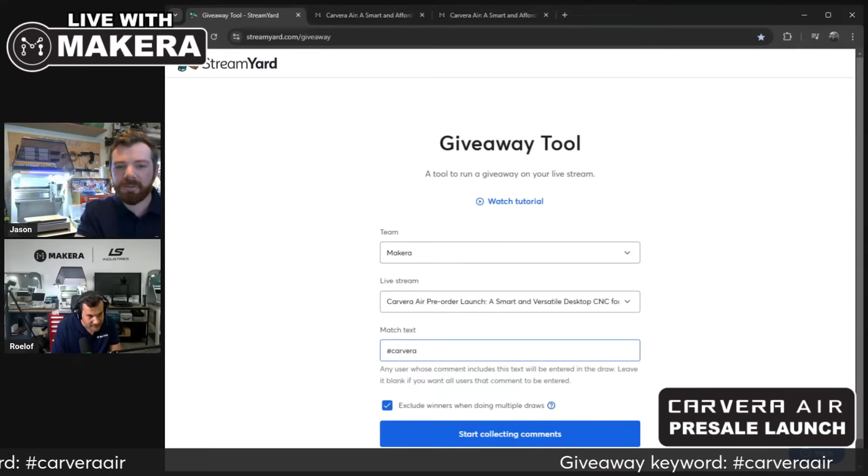Let's give this some time. Somebody said hashtag let Roelof sleep. I think that's good, that'll be the next giveaway. I saw one person commenting, if he doesn't win the machine, can he win a factory tour?